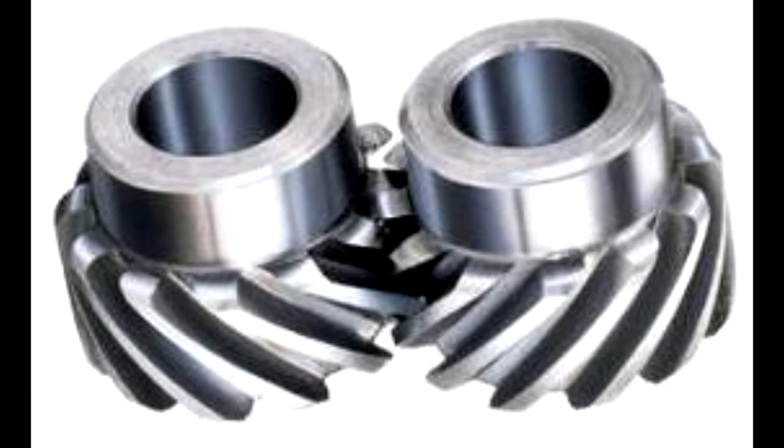The buildings connect to each other through a central square and roads. The square's form is analogous to a gear assembly. Hexagons are extracted, giving order through the use of the isometric grid.

The coffee shop is located in the center of the terrain. We took the form from the nodes. The design plays with hexagonal prisms organized in a radial form at the center. There are dining areas, and a volume extracted at the center becomes a center garden and light cube, acting as the weeping wall.

Around the main volume are other volumes which repeat but change in independence and hierarchy. The ceilings are inclined to control the strong weather and to keep consistency in the design of the whole project.

Now I'm going to talk about the museum. Its form is inspired by the crane, applied in this building as an art exponent.

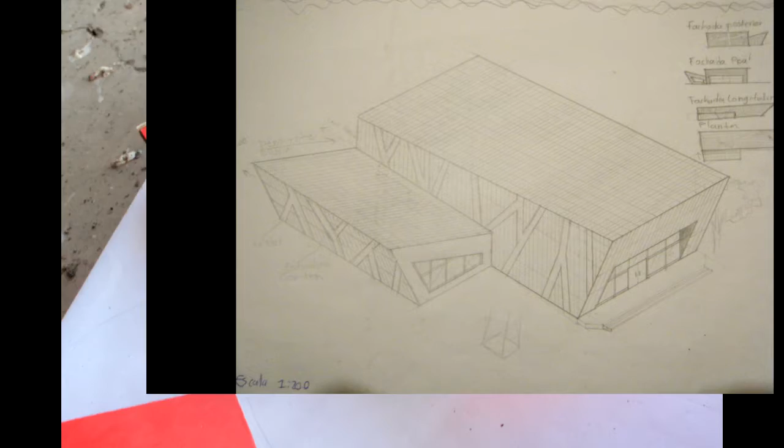It has two main volumes, which are inverted and truncated pyramids. The outdoor and permanent showrooms are in the same building. The permanent showroom is at the base, surrounded by the outdoor showroom, delimited by iron pipes that look like dipsticks. The biggest volume is on the second floor, and it is the museum.

The closed theater has two regular volumes with inclined walls and ceilings. The main volume is the bigger one. Its main front is inclined in a convex form to give it greater hierarchy.

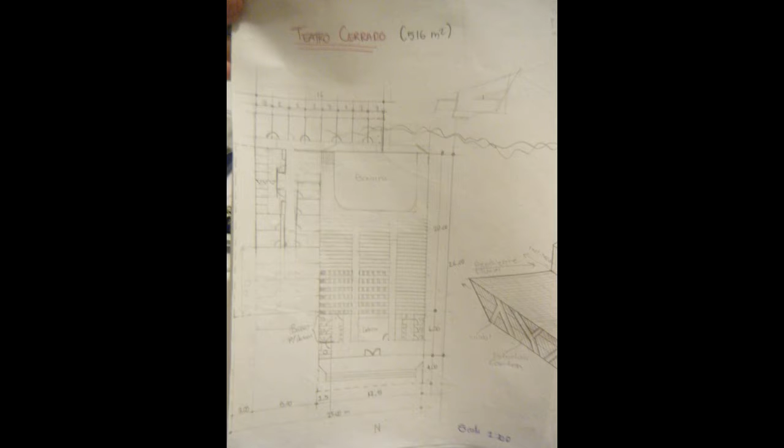On the axis are the ticket office, lobby, cabin, and stairs, and in front is the stage. The second volume has the same form but is smaller, and it's positioned as a canon. Inside are the backstage areas.

The agora's construction uses rectangular, hexagonal, and triangular forms. The distribution of elements is concentric to the central point, which is the stage. In front of the stage are repeating elements conjugated with the central axis.

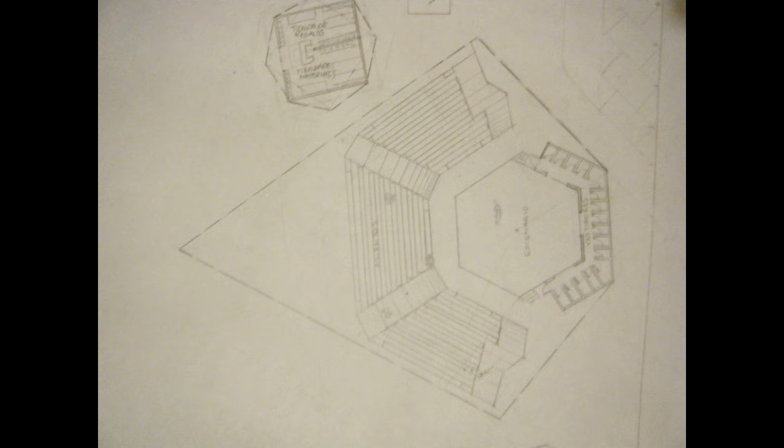It has an inclination of 10 degrees. In the back are the changing rooms. On the stage there are acoustic shells to control the sound. The ceiling is formed by a triangular structure, and also includes jalousies.

The administrative building uses triangles which are repeated, transformed, truncated, turned, and added to each other. As a result we get a rhomboidal plan.

The walls are straight and made of glass and steel. The ceiling is elevated, giving shadow to the building. Two of its corners ascend while the others descend.

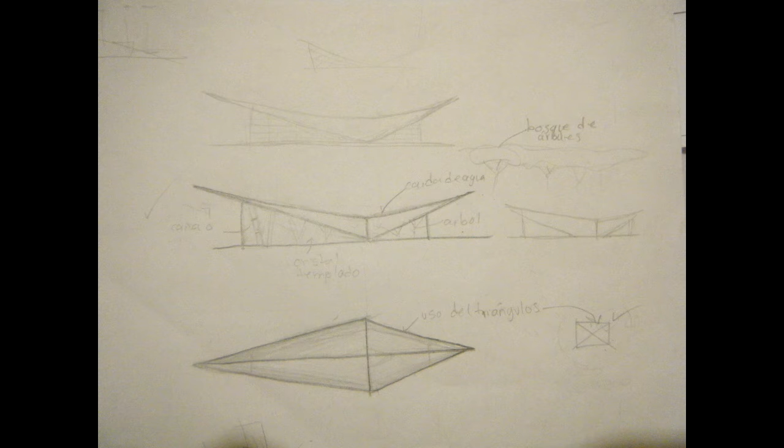The art school has two regular volumes connected to each other. The walls and ceiling are inclined to give more shadow to the building, while also giving it character. Gift and material store.

It uses the same volumes, as an antiprism. The use of this form creates general visual attraction for the client. The walls are inclined to provide shadow and to control rainwater runoff.

The parking has two floors. The top floor is outdoor with 42 spaces for cars. In the center there is a line of trees to give more shadow and visual attraction. The underground floor has 55 spaces for cars, with 3 stairs in the corners to reach the second floor, and also a pedestrian ramp.

The maintenance building has the same form as an antiprism with the same characteristics, but this volume is smaller.